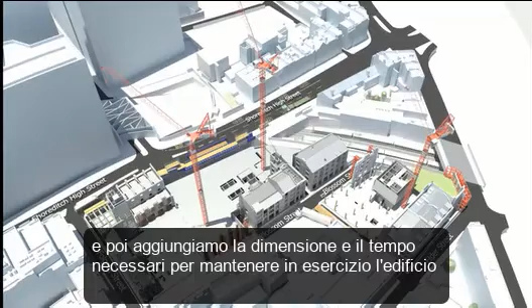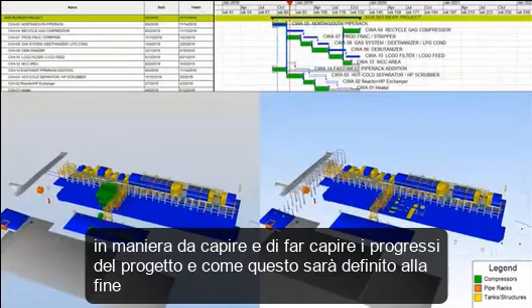We communicate the project plans to all parties involved, from running the equipment to delivering the materials to the on-site logistics. Then add in the scale and time to this, needing to keep a facility open while the renovations are going on. Bridging the gap from those traditional paper-based workflows to the digital workflows to the augmented reality workflows, to be able to communicate and understand how this project is going to progress and what it looks like in the end. This is what Synchro Construction does better than anybody else, taking the digital information and communicating it with everyone.

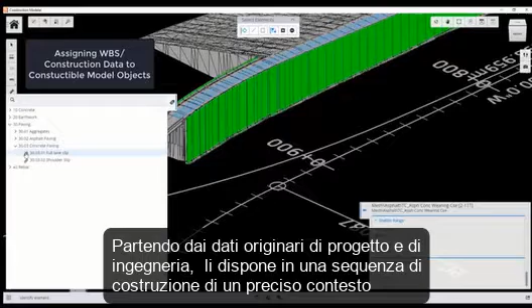So how do we get there? You need to take your original engineering and design data and understand it in the construction sequence, in construction context. So here we take items and break them down into constructible components. How do I physically construct this wall? How do I get my quantities? How do I understand that what I have there is how I'm going to build this? And those quantities drive durations, which drive your schedule.

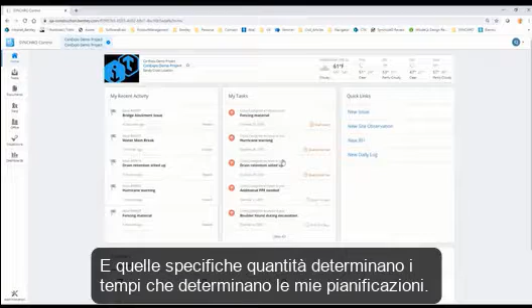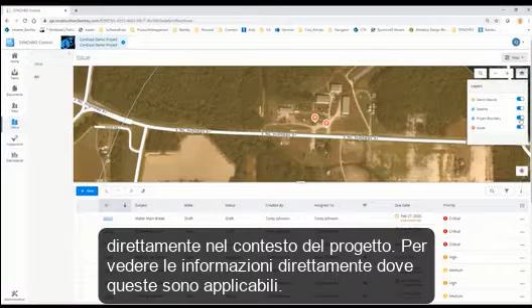So when we have all of this information, we also have to communicate to the rest of the project party. We can do this in the context of traditional information, but why not in the context of location? See this information where it's relevant. I can also throw in the context of a 4D model where I can see my issues, see the model, and then you can grow this to a very large scale. Again, communicating - that's how you build a construction project. You need to communicate and have all parties understand.

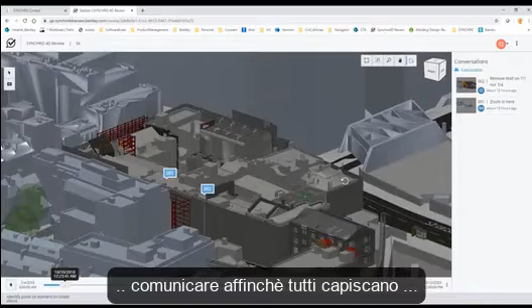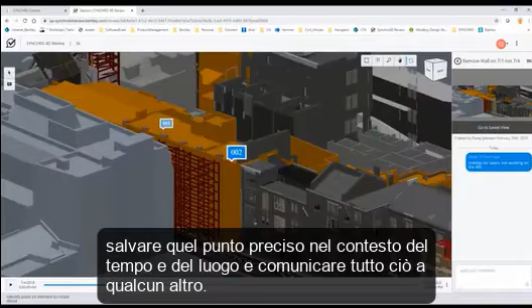Here we're seeing the actual sequence of demolition and then rebirth of a new facility. The beautiful part is people can communicate on a mass level. Somebody can come in and say, I see an issue at this point in time. They can communicate this, save the context of time and location, and communicate that to everyone else.

As a project is growing and moving forward, you can see how things should be progressing, and we can compare that to the actuals. How do we do this?

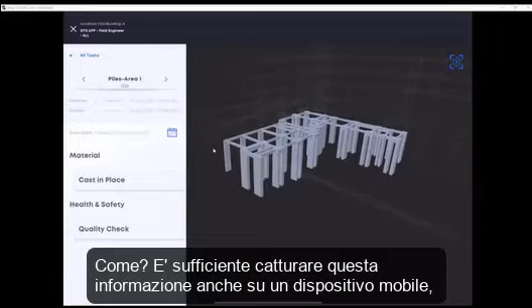You're grabbing this information from a mobile device and you can go in and status and communicate the current level of completeness to all parties. This information from the field goes back to the office and ties in with the schedule.

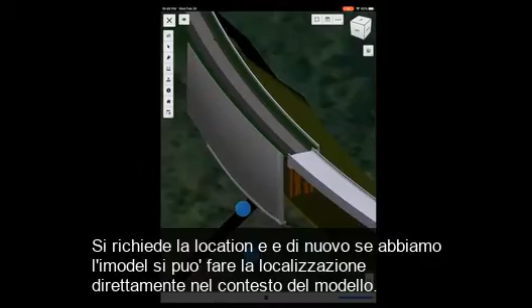Now I also have the ability, beyond project statusing, to address issues that may come up out in the field, problems that need to be addressed. We can do the location - and again, if we have a model, we can do the location based on that model context. A picture is worth 1,000 words, so we can make that information available for them.

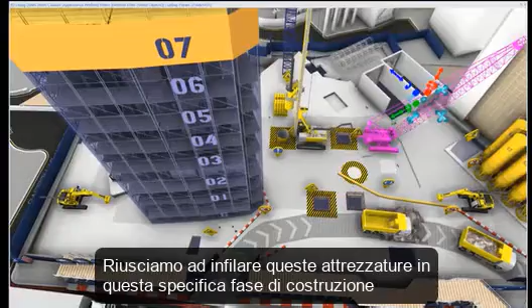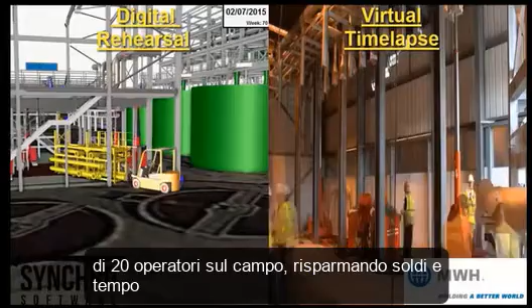Here we're bringing in and placing equipment. Can I fit this equipment during this stage of construction? How do I do this? This is called a digital rehearsal. Here we're seeing a digital rehearsal that was planned to make it more efficient for the 20 folks out in the field, saving time and money.

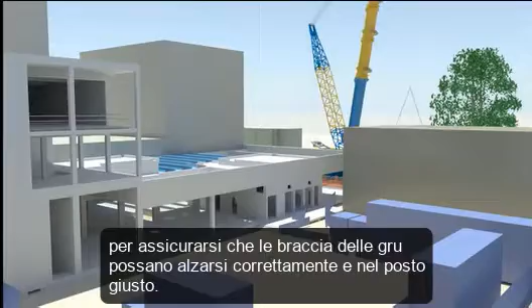Also, when you're running large equipment like a crane, you want to do the rehearsal and make sure that you can actually lift those beams into place. Here we see the animated model, but the same model is now applied to augmented reality, the HoloLens, and they're out on site. You can actually see how this goes in place, and you can see that those beams have been placed there.

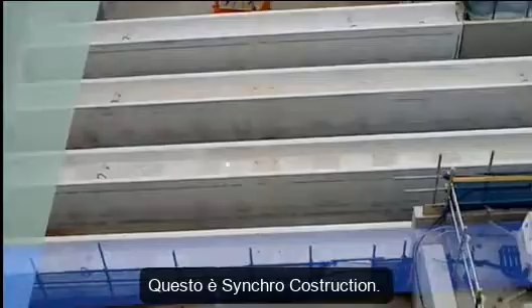This is Synchro Construction. We tell that better construction story.